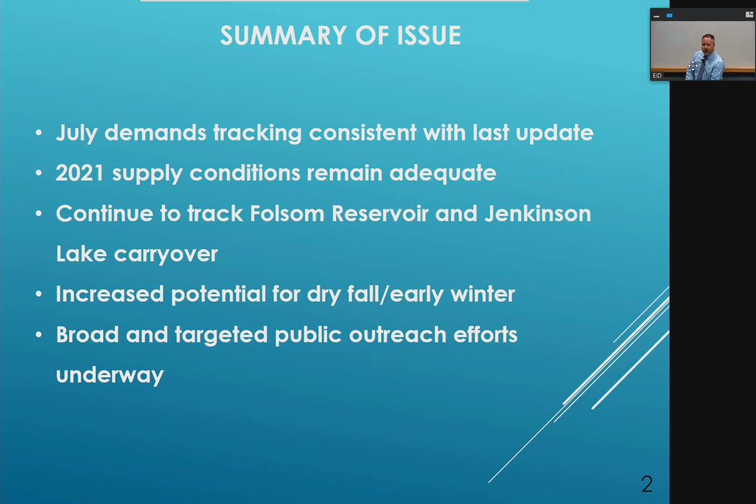Slide 3, please. These are just our standard water supply updates, this is as of last Monday. No significant changes, just the typical trends you see this time of year.

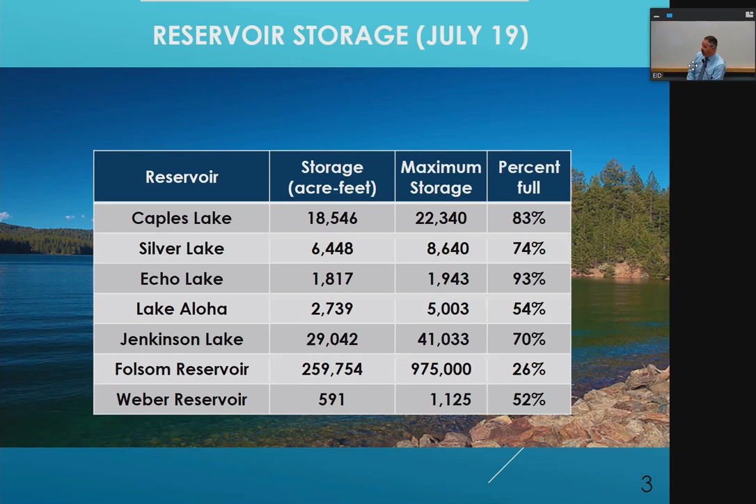We continue to meet all of our water supply demands, both at Reservoir 1, Reservoir A, as well as exercise permit 2112, previously diverted water, as the board's aware of the curtailment. We're working very carefully to exercise our water right portfolio in light of current conditions. And Folsom Reservoir continues to trend on that projection of meeting the 200,000 acre-foot carryover by the end of September, which is important for the district's intake structure later this fall.

Slide 4, please. We tried to make this slide a little more legible. I know it's always a big bowl of spaghetti noodles, but what we did is show the typical years—what we call that—we kind of made all those pastels.

So you typically were operating in that 25 to 41,000 range. Remember, this is a 2-year reservoir, the only district 2-year reservoir, and we're in year 2 of these dry conditions, so now we're down in these lower conditions. We've ticked up maybe 100 to 200 acre feet for end of year in the most conservative, very dry conditions. What you typically see if you look at the curves, October, November, December, is that flattening out.

We get a little bit of rain, but obviously we have to plan for the worst, plan for no rain, and that's why you see that slope continue. But if you look at almost every single year, that's not the case. We hope we'll see some flattening this fall, but nevertheless, we continue to plan.

So we haven't really been at this level in about 25 years, since 1994. Pretty significant, but nevertheless, the reservoir is doing what it was supposed to do. It's a 2-year reservoir, and we're meeting our supply and demand projections.

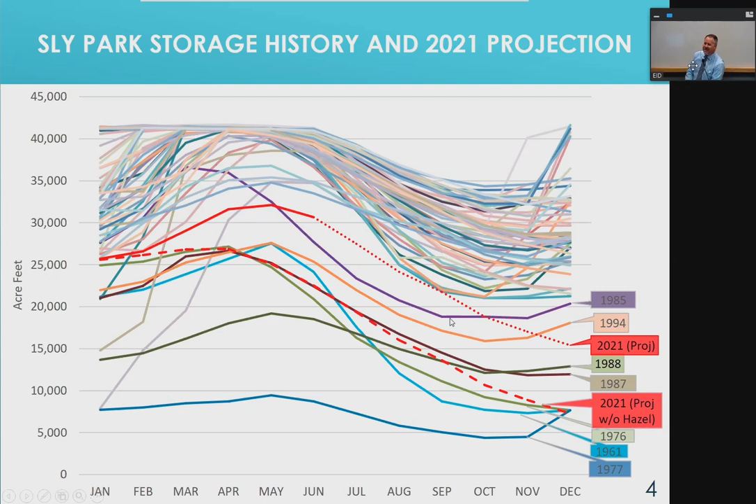So we've now moved to drought declaration, drought emergency in 50 of the 58 counties, and that's why the General Manager described some of these funding sources starting to come available, specifically hauling, which is the one we're looking at short term to see if we can qualify for.

Since your action at the end of last month, the governor has now also asked statewide for a 15% voluntary reduction—what we call voluntary conservation. So it really conforms to your action as of last month.

I think it's important to point out, or maybe just a coincidence, but we asked for a 15% voluntary reduction, and the governor immediately copied us. My gosh.

Leading the way. Right. Slide 6, please.

Okay, and it looks like we're on track to use district-wide about 5,500 acre-feet this year, which is about 4% over last year. So as compared to that spring trend, we're getting much closer to that typical demand—that's pretty much what we expected. This is even a little bit more favorable, I'd say. We were thinking 8 to 10 above, but what you see is in the spring everybody turns on their sprinklers, and by the middle of the summer everybody turns on the sprinklers, and now it's just a matter of asking for that voluntary conservation to try to get below that number, hopefully at some point.

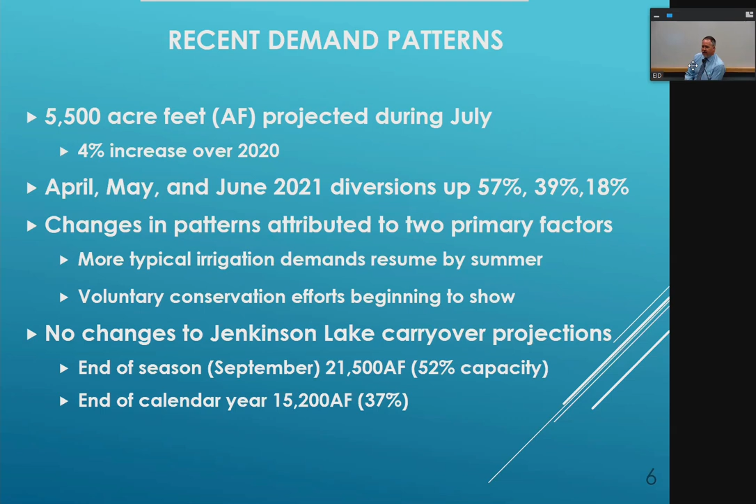We don't have any real significant changes. Like I said, 100 to 200 acre feet added to our end of season projection for Jenkinson, as well as that very conservative 15,000 at the end of the calendar year. Slide 7, please.

So I think this kind of does it in a nutshell. I hope there's not too many lines on this. Red is 2021, and our dashed line is where we project we will be, hopefully with some conservation—we'll continue to go below that. You see we're moving more toward the typical demand curve, and we've included that dashed line, which is our voluntary target, 15% below 2020. So that red dashed line is 15% below the yellow line, which was last year's demands.

You see we sort of crossed over that 2013 pattern, so obviously word is getting out that there's a drought, and people are recognizing current conditions and trying to do what they can. Pretty nice change of course over the past 30 days.

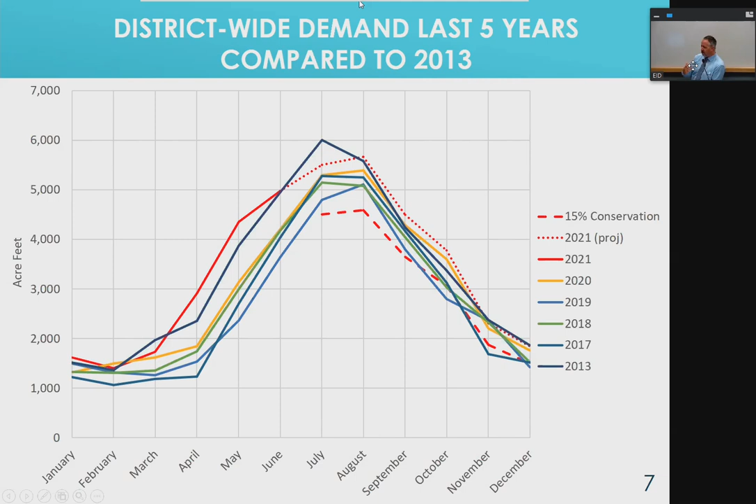Thank you, exactly, that was my point. Thank you, Jim. We're one of the fastest growing agencies, along with probably the city of Roseville. So General Manager's point is very important, that on a 1% annual basis, over 10 years you have 10% more customers we're serving, and obviously we're not. So it just shows it's important to look at that per capita consumption going forward. We'll probably provide some metrics along those lines.

Before you leave this slide, it's just interesting to note that our summertime demand is 6 times our winter demand.

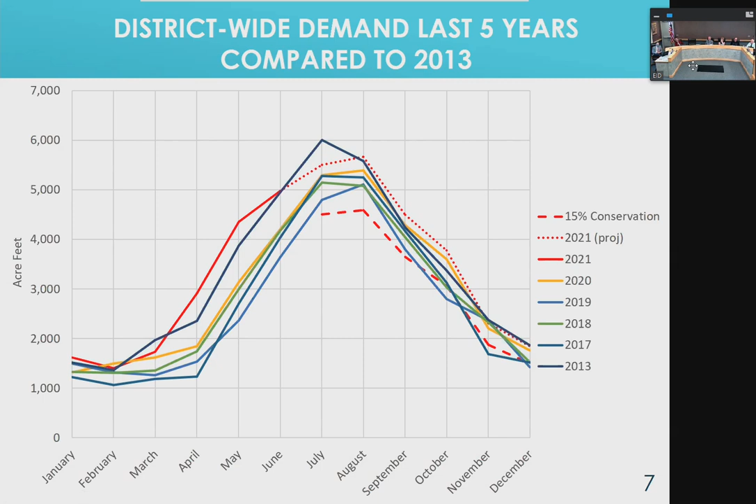Depending on how you slice it, we look at our water in storage. We're diverting water from storage, so we look at this on a monthly time step. This information feeds into some regulatory reporting that our engineering department provides.

The next slide shows similar data but for our recycled water customers. I won't speak too much to this because we'll have Tracy come up in a minute to dive into the details of how we're managing the recycled water system in these challenging times.

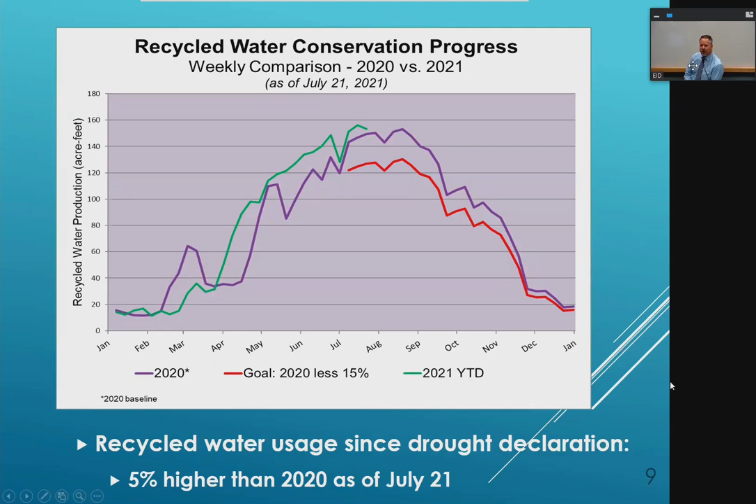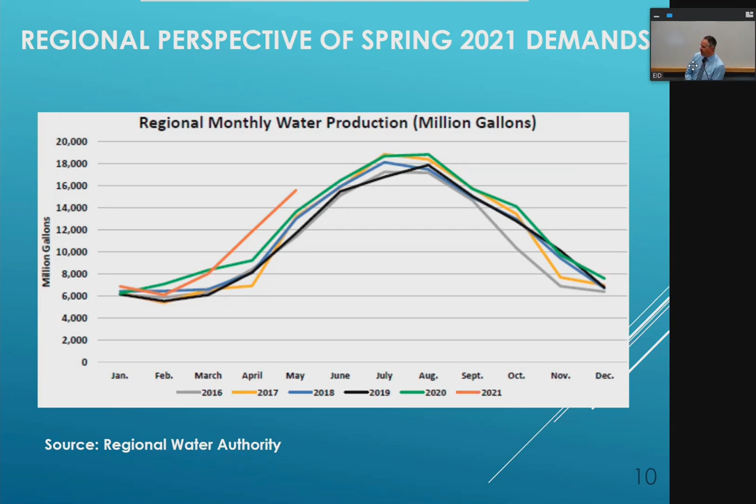Okay, next slide please. It's important to give a regional perspective of how our customers compare to all of our neighbors. This slide was shared by the Regional Water Authority, covering all the water purveyors in the greater Sacramento area, roughly a 3 to 6-county region. As you can see, everybody was significantly higher this spring—we weren't alone, we're all responding to the dry hydrology. Unfortunately they're still crunching the June numbers so it's a little lagging, but we'll continue to show this data going forward since it's important to know how our customers compare to the rest of the region.

Slide 11, please. We haven't gotten any updated projections of concern regarding Folsom. Obviously things will be tight later this fall, and it depends on whether it starts raining. But through our main demand period, our water supply intake is secure. Going into the holiday season, if needed, we could rely on Jenkinson Lake to meet demands if that facility wasn't operational. We don't project that to be the case, but we can meet our peak summer demand when that facility has to be online. We'll continue to follow and give regular updates.

Slide 12, please. Are we continuing to divert into Jenkinson Lake? No, we basically ran out of sufficient water to do so around the 10th to 13th of June—mid-June, something like that.

So we moved our targeted volume. It's important to note that supply functions in concert with our Reservoir 1 supply. We aim for a target, hit it, and then allocate the rest of the supplies so Reservoir 1 has enough water to operate for the rest of the season. We'll fully utilize that water right, but we have to make projections and plan carefully how we spend that budget. As a sales plug, this is also why it's important that we refurbish the intertie between Res 1 and Res A. Exactly.

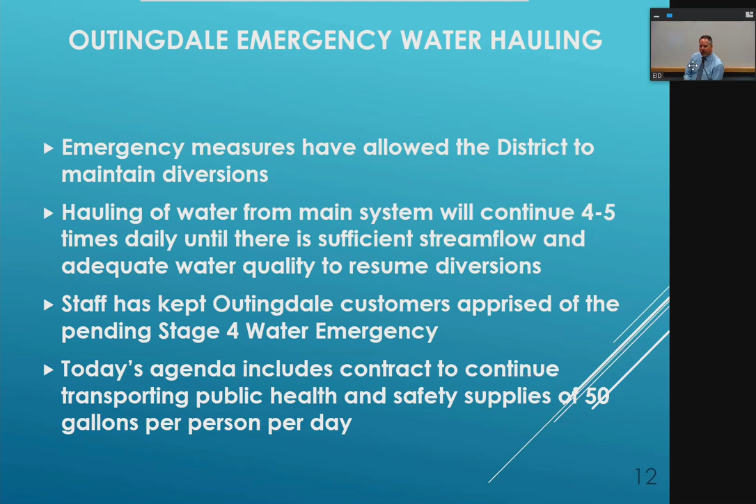Okay, slide 13, please. And now I'm going to turn this over to Tracy to discuss recycled water for you for a few minutes.

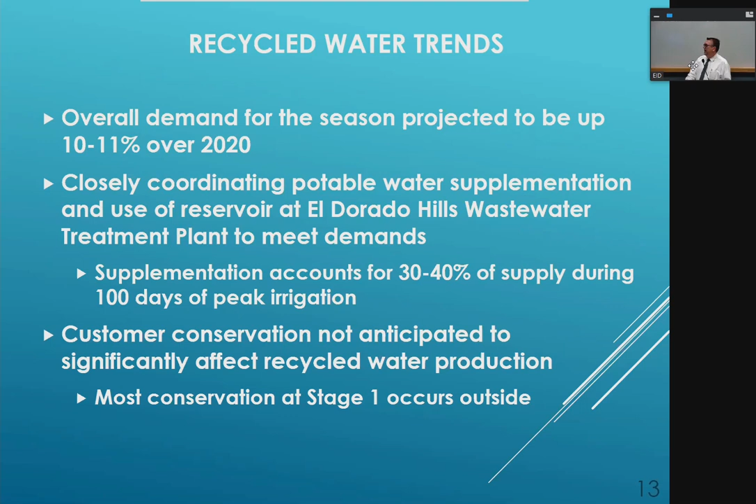The current conservation on the drought declaration, we don't expect it to have a dramatic impact on the baseline flows of the treatment plant because most of the conservation efforts will be towards outdoor use, and you won't see a lot of change from the baseline flows of the treatment plant.

Next slide, please. So this is the overall projections. As Dan mentioned a little bit ago, on a week-to-week basis since the drought declaration, it looks like we may have seen a slight improvement, but this is representative of the 10% overall increase in the recycled water demand so far this season. That's a combination of new accounts and it's just been really hot and dry. And it really shot up.

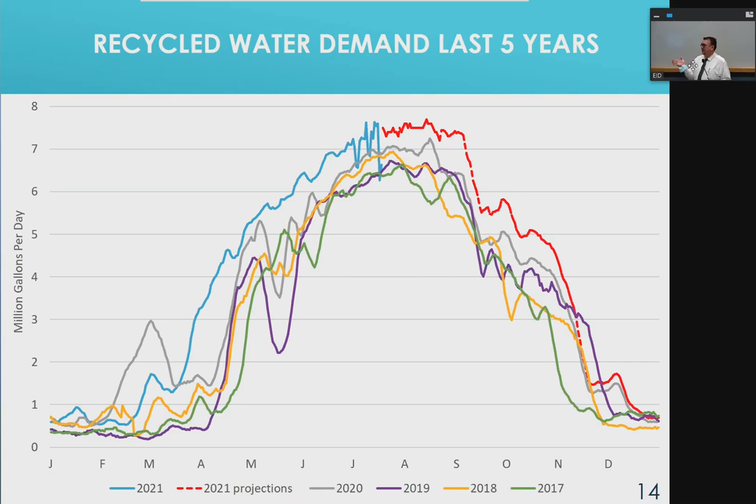We've seen a little bit of the modulation, similar to what you see in water. We saw a really steep increase, but as the summer's gone on, people have settled in, and it kind of sort of flattens out more to a normal pattern. Next slide, please.

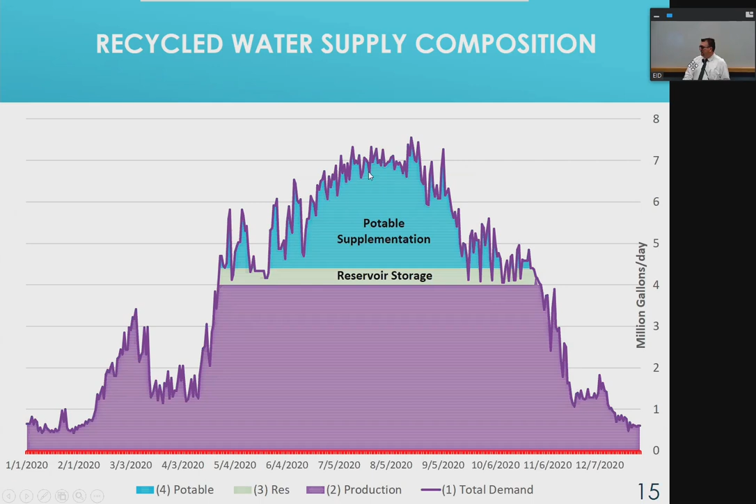Next slide, please. In actual operation, it looks more like this, where you see that we're able to use that storage reservoir at the El Dorado Hills facility to make up days when the potable system might become constrained. And then on days where there is more water available, we can conserve that for later on in the season.

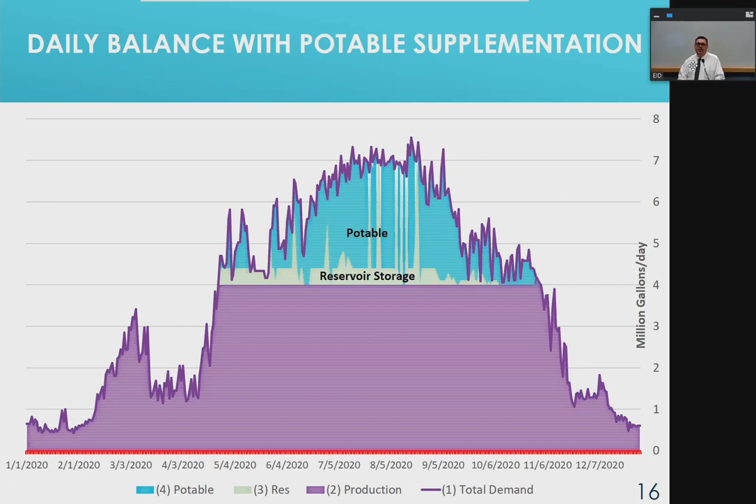Next slide, please. So as I said, that storage reservoir is very important. Even though it's a small percentage of the overall seasonal usage, it really represents operational flexibility, and it's the leading indicator of what we have available to us at any given time.

If you look at the top model run, if we're using roughly an average 7-day average of 400,000 gallons from that reservoir, we're able to make that reservoir last into October. The goal here for us is to start the season with that reservoir clear full and end the season with that reservoir empty. So the top model is sort of where we're standing right now - if we just average about 400,000, we're able to stretch that reservoir volume out into October.

And the bottom reservoir model is the hypothetical scenario if potable water went away. If we didn't have any potable water, you can see that red line drops down around August 1st.

We have about 8 or 10 days before we wouldn't be able to meet those peak demands anymore. Although I'm not here to sound the alarm. We have our bi-weekly meetings, and right now staff still feels like we're going to be able to meet the customer's demand for the 2021 season. The real concern would be if we have a longer term drought, then that would be a concern.

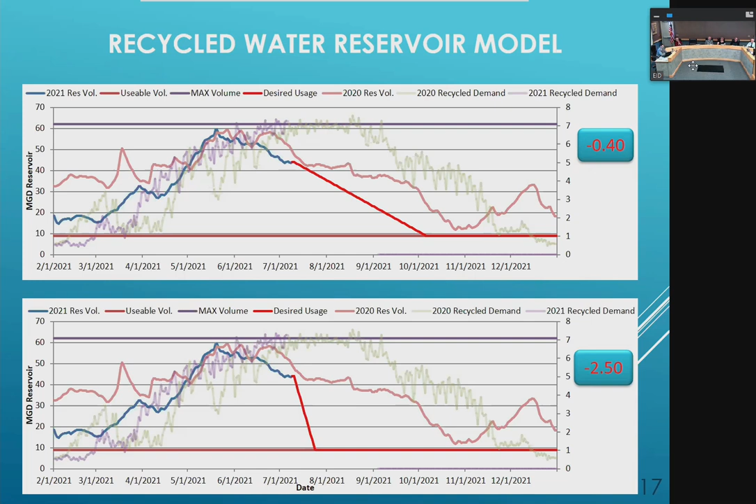For the record, I'm happy to look at all the infrastructure we're willing to put in. But one of the points we're trying to make this morning is that we're utilizing 100% of the recycled water available to us right now. In fact, so much so that we have to rely on potable water to help meet peak demand. More storage would certainly help.

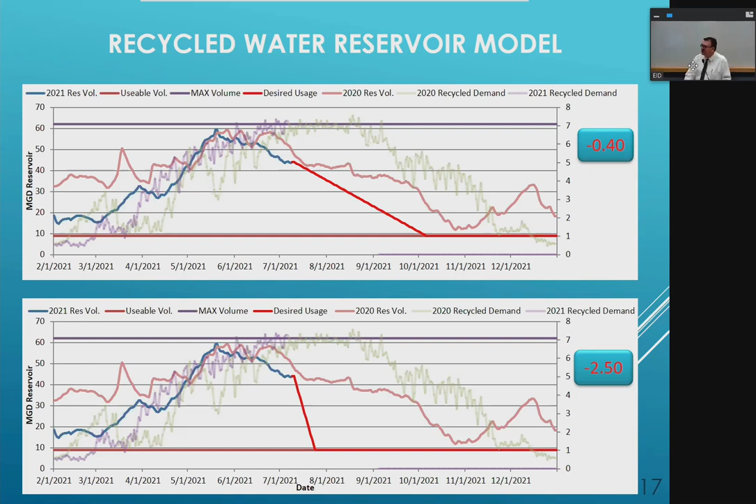And with that, I'll turn it back over to Mr. Corcoran. Thank you. We're almost done here.

As we discussed at the beginning, we look at the long-term climatic models, El Nino Southern Oscillation, and there's more potential for La Nina, colder, drier conditions, a slight increase in the likelihood. I like to give positive news, but this isn't very significant unfavorable news. It's not trending in the right direction at this point, still quite a ways out. We'd like to see at least a half degree, maybe three quarters of a degree, above normal long-term in the eastern equatorial Pacific, so there's the lingo.

I think what we're most concerned about, which you've seen especially this May from state forecasters, is the cumulative moisture deficit. That's new lingo for Webster's dictionary, meaning with multiple back-to-back dry years, the underlying ground is so dry it's going to take a while. You've got to keep watering before that water actually runs off instead of soaking in. So even if we get a few thunderstorms, it will be a while before we see surface flows again, and trends at Outingdale will give us a hint.

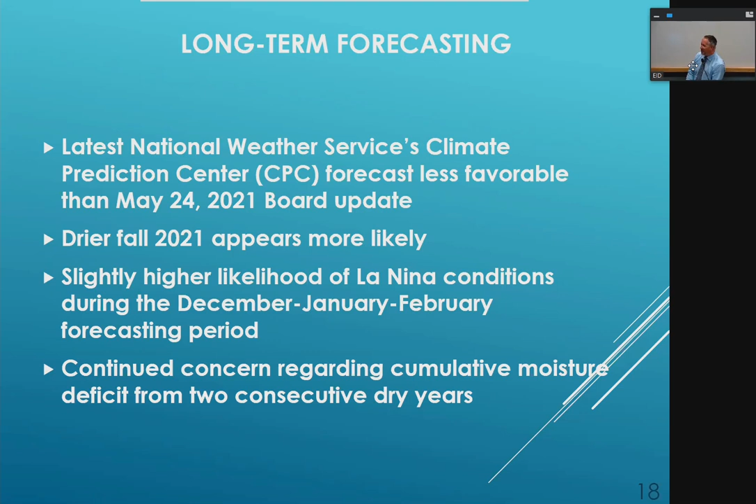We'll see, that's kind of our easiest small barometer, and then we'll move forward from there in Project 184, etcetera. We're fortunate in Project 184 because the upper area is mostly overlying bedrock, so it's a little different than the lower watersheds and why they were so significantly impacted. Okay, next slide please.

The timing will be earlier, but we're hoping we were able to make it through most of the summer. We see a lot of boats coming up the hill because they can't go to Folsom or other places, so we've been fortunate to provide a pretty great opportunity. Think about another unanticipated benefit: if we had not moved that water to Hazel about the second weekend of May, we would have had to impose this restriction—meaning no water skiing all summer on Jenkinson Lake. So it would have been a much different opportunity. The primary intent was water supply, but there was another recreational benefit that occurred.

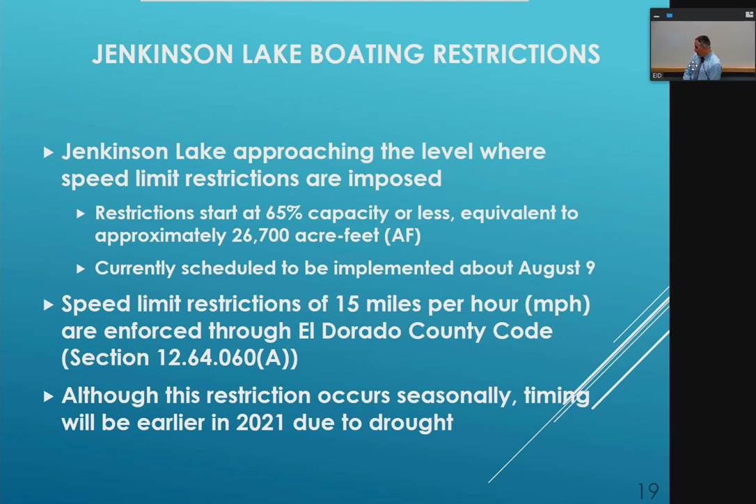I've got a couple slides on public outreach, using a variety of means and methods. Our primary focused outreach is to those 193 customers most affected by current hydrology—the folks in Outingdale moving through some really tough conditions right now. In addition, we did a news release following the declaration on June 28th, which went to all news outlets and all customers who subscribe to e-notification, social media, Facebook, Nextdoor. And amazingly, 89% of our customers have an email, so 89% received a direct message regarding that action at the end of June.

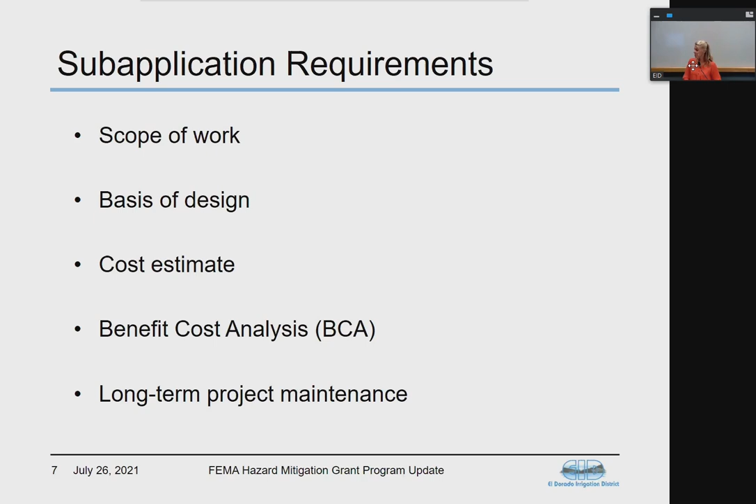Absolutely, yes, and I'd like to give special thanks to Rudenko and Tracy for assisting with that benefit cost analysis. A lot of work went into determining PSPS likelihood, wildfires, and the number of customers impacted, so a lot of information went into that program. Thank you to Rudenko and Tracy. Alright, next slide.

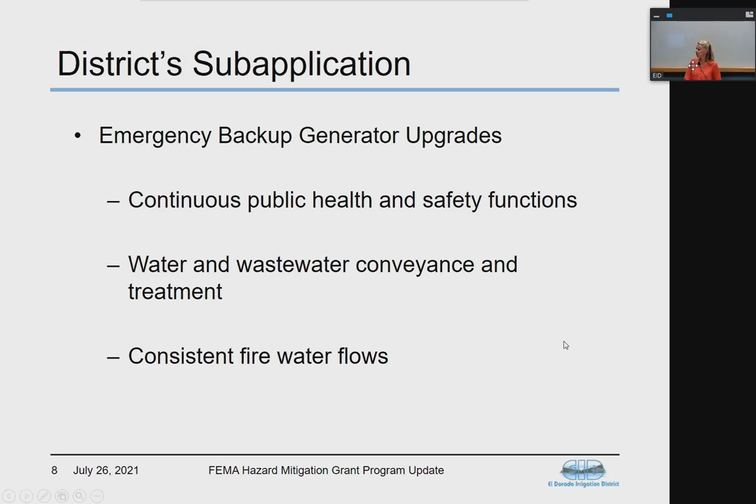When the sub-application became available, the district's engineering and environmental staff thought this would be a great opportunity to obtain some non-rate funding for backup generators. The overall intent of this project was for continuous public health and safety functions, in particular water and wastewater conveyance, and also to maintain consistent fire flows during these emergency outages.

Staff included 22 stations, ranging all the way from El Dorado Hills to Camino Heights. We tried to cast the net very broad and include any stations that did not currently have a generator and that could also spatially accommodate one.

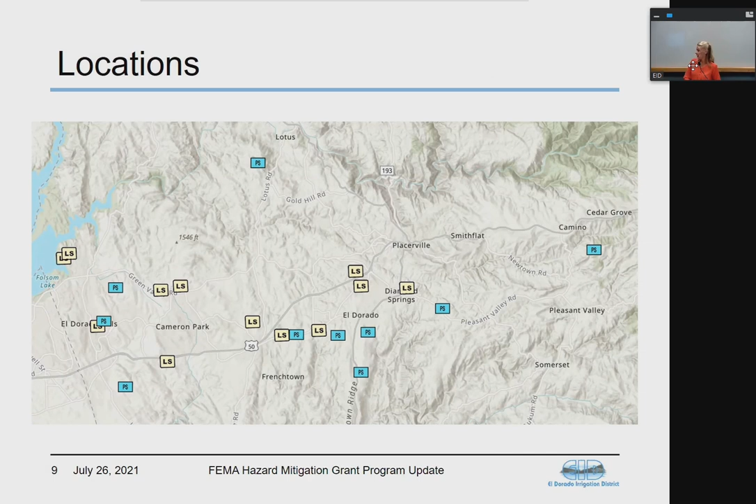There are still a handful of stations that were not included. Our ops team has been very innovative with trying to look at solar panels or battery packs just to maintain communication. So although we might not be able to fit a generator and run the station, at least we'll be able to see what the station's doing and assess when we need to go and respond. Next slide.

I've included photos of a couple of stations that are included in the application. Just for perspective, during an outage, it's operations all hands on deck, running around to all the different lift stations, transporting the generator, hooking them up, either pumping down the wet well or pumping water through the distribution system. So it's quite an effort of constant mobilization and demobilization of generators. This project will really help ops during these outage events.

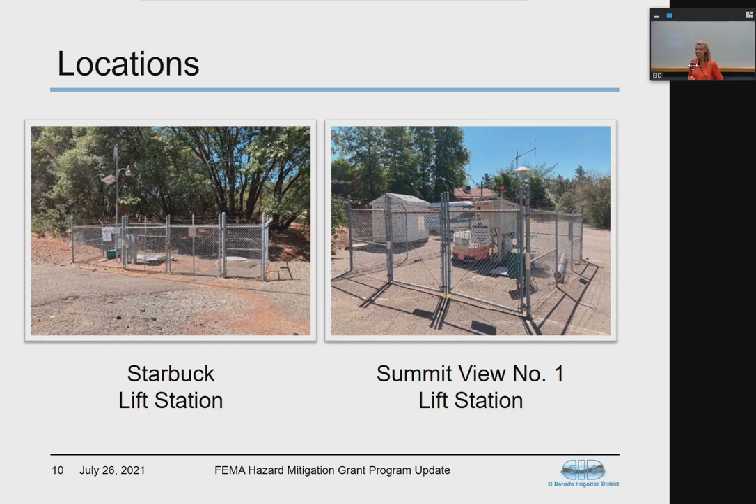Next slide. So the scope of work for this project is to perform some preparatory site work, so minor fence work as needed, some conduit work and some concrete flat work. Install the backup generator, install an automatic transfer switch, and then also integration with our SCADA system, just so we can see what the generator is doing, any alarms, statuses, and whatnot.

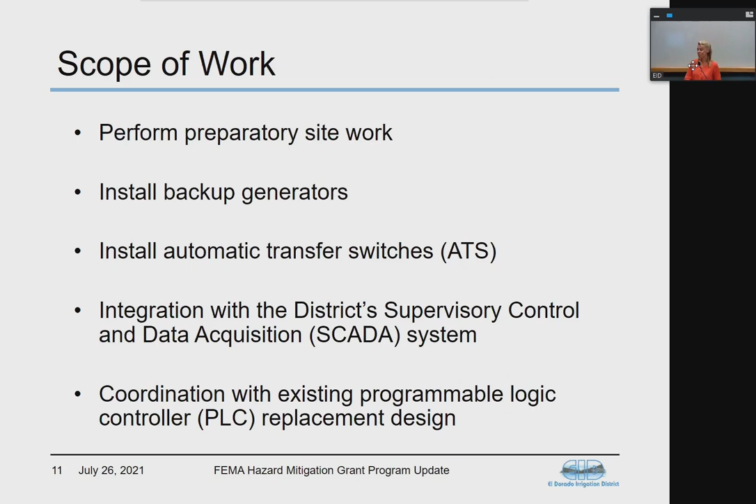Staff also decided to coordinate this project with an existing PLC replacement project already on the CIP, to replace 4 PLCs at the sewer lift stations. The thought behind that is we have a contractor there on site already, which will reduce mobilization and eliminate any redundant programming that would be required. Next slide.

The overall project schedule, I'd like to jump right into design and then solicit the bid package, hopefully at the beginning of 2022. Perform construction in 2022 and 2023, and cross our fingers, hope that generators are there and ready to run summer of 2023. The grant requires us to complete this project within 3 years, so all hands on deck. Next slide.

Staff is not requesting any funding at this time, but I did want to include this slide just so everyone has perspective going into it. Total project estimate as of 2019 was $2.4 million. The HMGP will provide a 75% reimbursement of those costs, so the district funds will cover the remaining 25%, as well as the PLC replacement portion of the project. All of these costs will be included in the next CIP round for the 2022-2026 CIP.

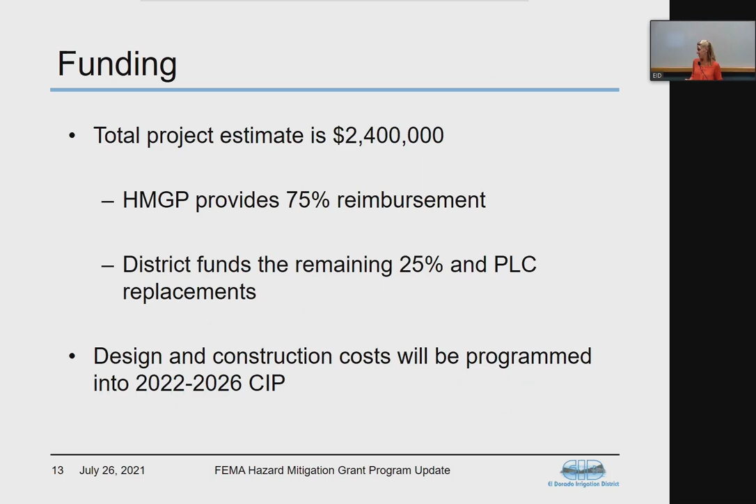All right, any discussion or questions? I have a question. One of the challenges in this whole public safety power shut-off arena has been keeping the generators fueled. In their design, what is the anticipated runtime for these generators?

Director Osborne, thank you, it's a great question. Our fleet manager and supervisor actually have every single generator asset's runtime, fuel type, and routes all laid out. So when we enter a public safety power shutoff, we have designated crews that know how often to go around. Those are for the sites that we can fill ourselves with dedicated fuel stations.

Other than that, the larger sites, like the intake at the Folsom Lake pump station when that went down, or Reservoir A, we do have Hunt and Sons from across the street there. We're a priority, obviously, as a public safety partner, to have those on a fueling route, so we make sure we don't get that sputtering sound of running out of fuel.

But can I ask, on this design, how big of fuel tanks are we anticipating for the new permanent installations? I don't think we're asking for anything outside the normal in terms of fuel tank size, because we can fit them into the routes of where we're going to go. Typically they have an embedded secondary storage, so if there's a leak in the primary storage - usually called the belly underneath the generator, the fixed unit - that's typically the design I anticipate.

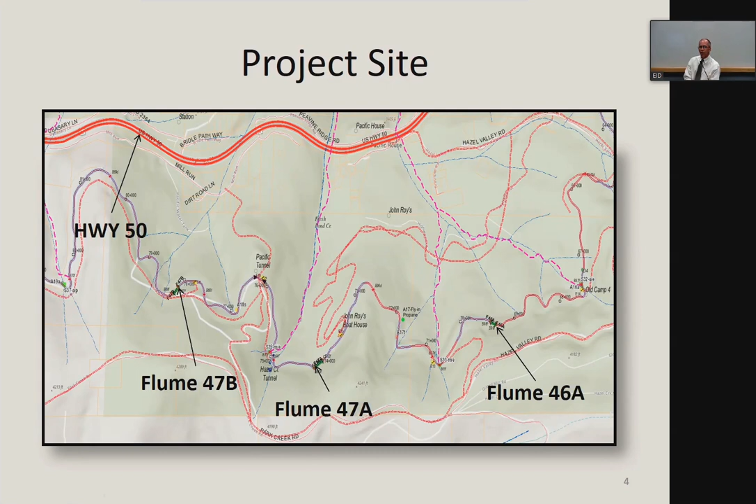Next slide. The next three flume sections are in relative close proximity to each other. They're separated by about 2 miles between 46A and 47B. Again, we have Highway 50 right below. What makes these a little bit more critical is that we have cabins and residential below each of these flume sections. So 47B, 47A, and 46A.

Note also, I'll point out 47A, we have an access road that goes already to the flume section. We will be needing to work on access for flumes 46A and 47B. If you can see it, 47B, this is our access road, what we call the flume access road for this segment, and it'll show up in a photo in a second, how we're maybe being able to get access with that. But again, that's that arrow, just that red line right below 47B there.

You mentioned residential down below those flumes. Is that one of the tracts? No, not one of the tracts. But there are residents in that area, especially right below 46A and 47A. There's a group of homes that we know that people are there full-time.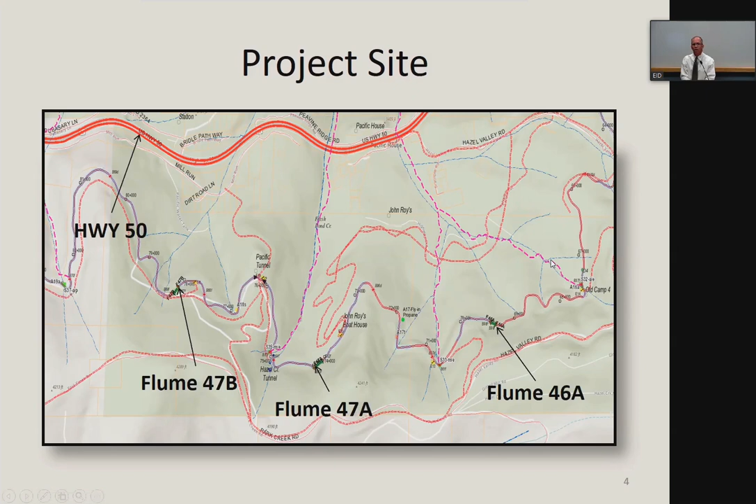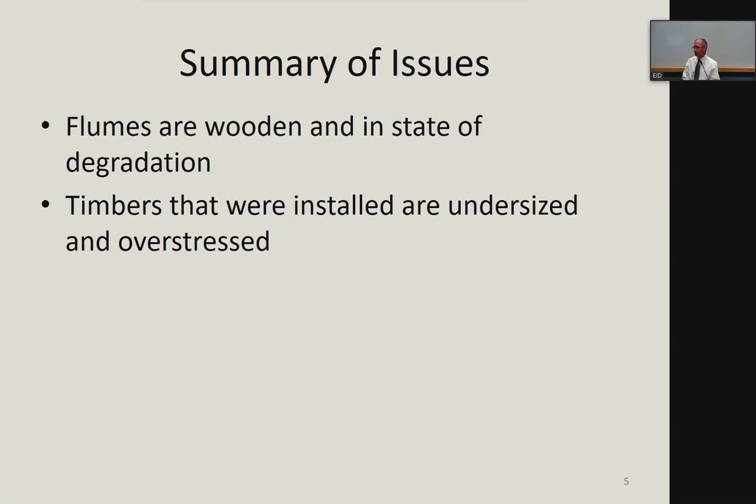Next slide, please. So what we're facing with these flumes is that these are all wooden flumes. They are in various different states of degradation. And most of the timbers that were installed at a time where now structural standards have increased. And so they are undersized and overstressed. We'll show some of the stuff that we're experiencing.

So some statistics on our flume. We have what we call a 45A, which has some fiberglass in it, and we're getting some delamination on that fiberglass. They all range in size between 120, 130 feet to 200 feet in length. These are flume segments that we're hoping, if everything works out right, our crews will be able to do.

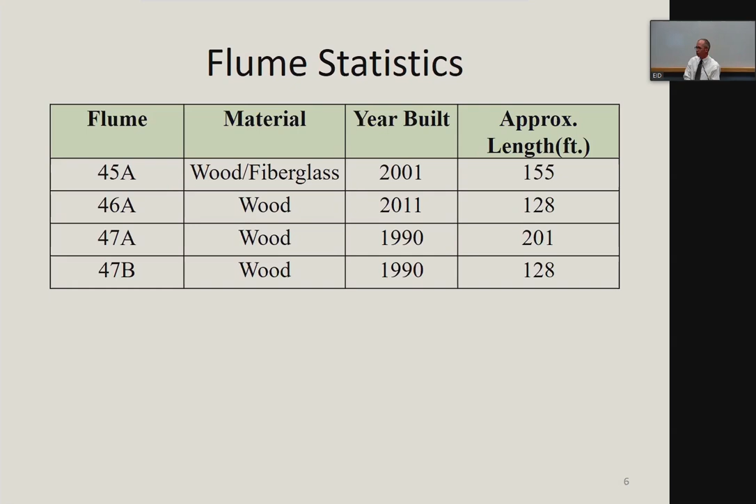You remember a couple of years ago we did Flume 47C. Our crews kind of got their feet wet with that. These are all of similar length and going to be a similar design. So we feel pretty confident, if time and budget allow, that our guys will be able to handle these during the outages.

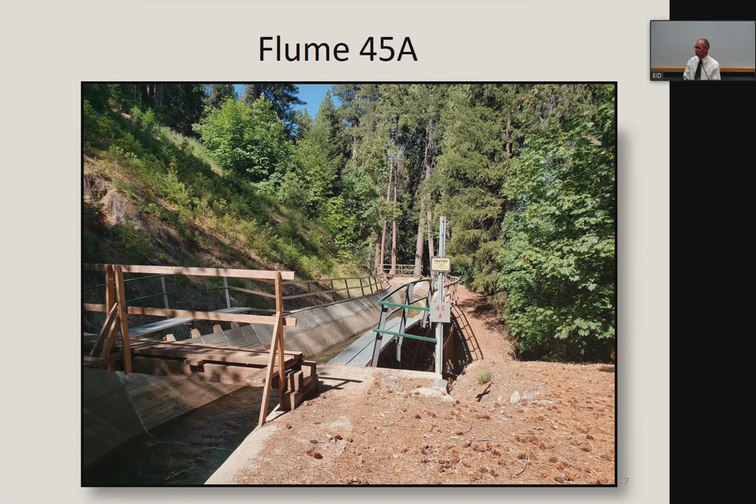So this is Flume 45A, our fiberglass section. If you notice the footbridge there, you'll see this segment right here. For people watching via Zoom, it's just the left-hand side of the flume, that different colored segment. That is the fiberglass section. I think it was done as an experiment to see if it would last a little longer than our wood. We didn't get the length that we had hoped with that.

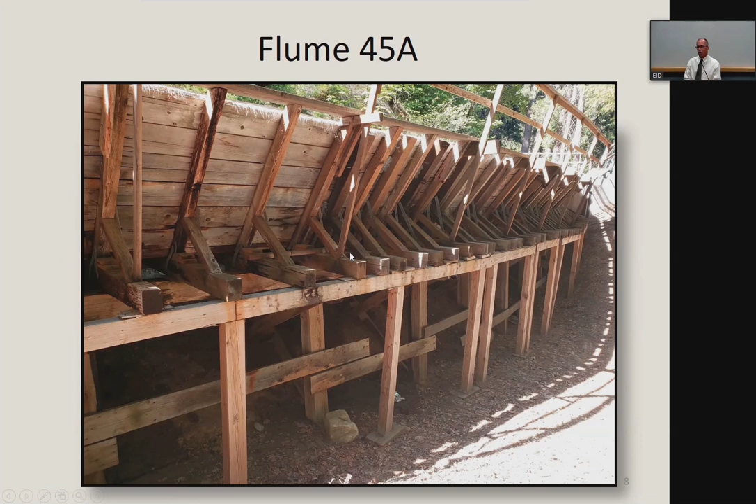This is showing the supports, how they've been re-buttressed over the years. This stuff in the foreground is what our guys have come in to add additional support. And you notice right below this segment, you can see where we've added additional cross sills in there, again to add some strength to get this through.

So, going through the next few slides, they're all in similar condition. This is Flume 46A. This is the one we've got to work out how we're going to get to exactly. There's a possibility of some access roads above it that we're trying to investigate now, but we're going to have to determine that during design.

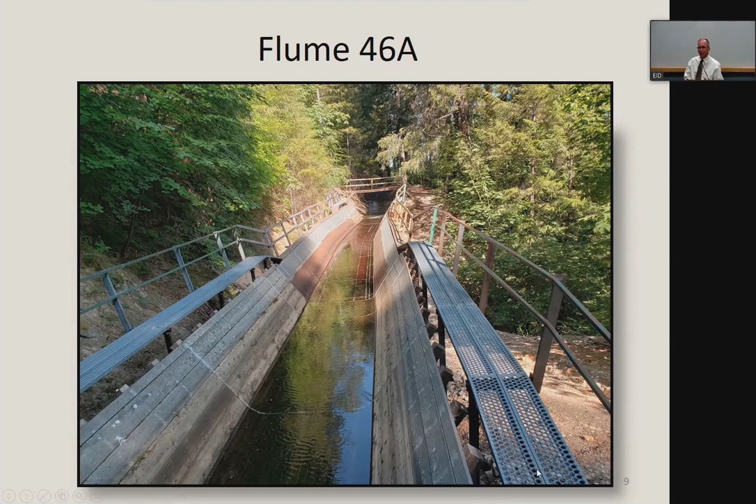You'll see that we have two different segments here. One that's been lined, that's this darker wood in the foreground of the picture and in the background right there. And this part is still the original timbers from the last redo of this flume in wood back in 2011.

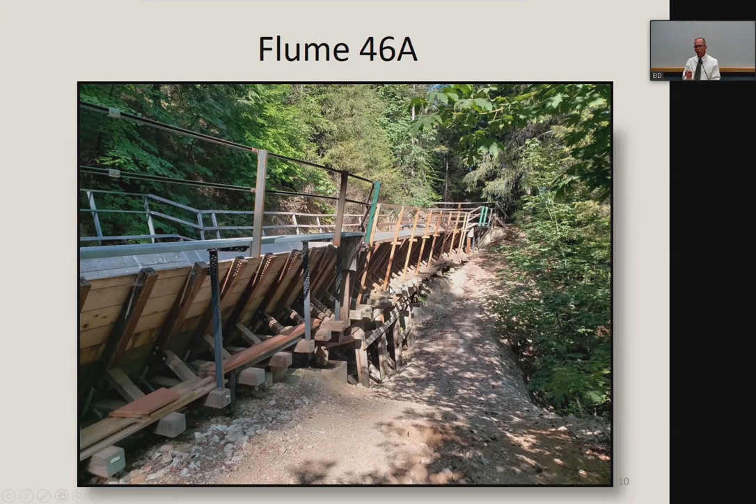So this is again the under-support structure. This shows again where we've got some additional buttressing in the low part of the slide, right in this area, and a little bit more along this segment right there.

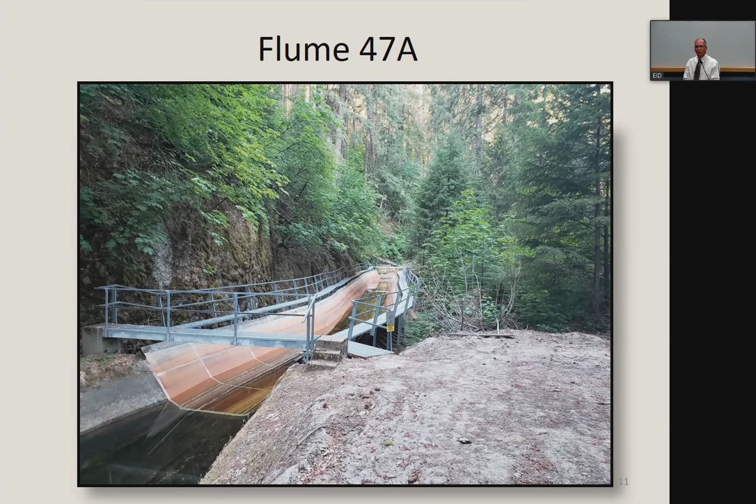This is Flume 47A. This is just upstream from that Hazel Creek tunnel where we take water into Sly Park. Upstream of things.

This one, you'll notice that all the timbers are located on the ground, which adds to some of the degradation with the water. When we water up, it takes a day or two for the wood to seal, and so we get some degradation on the wood because of that.

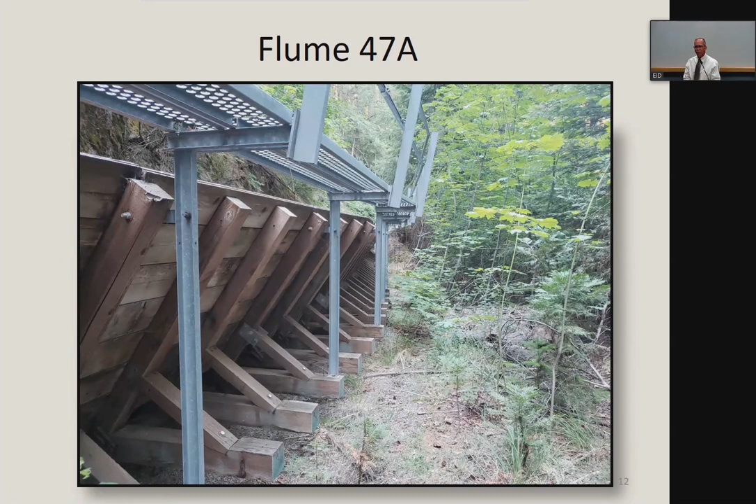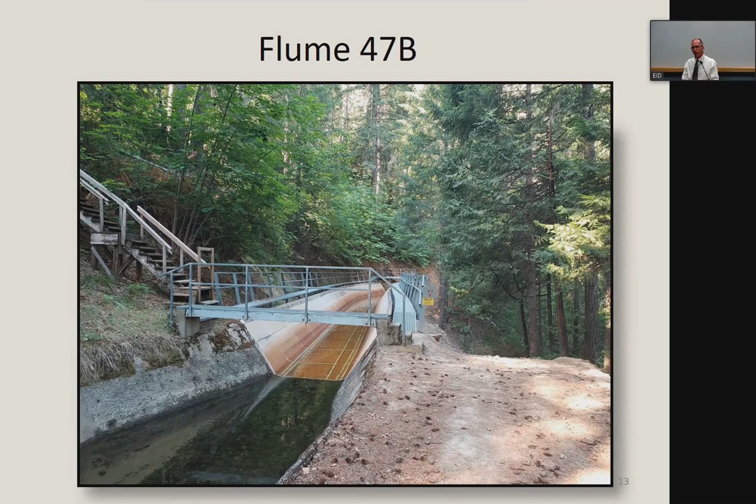This is 47B. Those stairs right there go to what we call the access road. It's rather steep, but we'll see if we can, during design, find a way to get down to this segment and be able to get equipment in to rebuild.

The next slide shows the underside again, similar to what we saw with the other flumes. The timbers again are resting on the dirt and need some work.

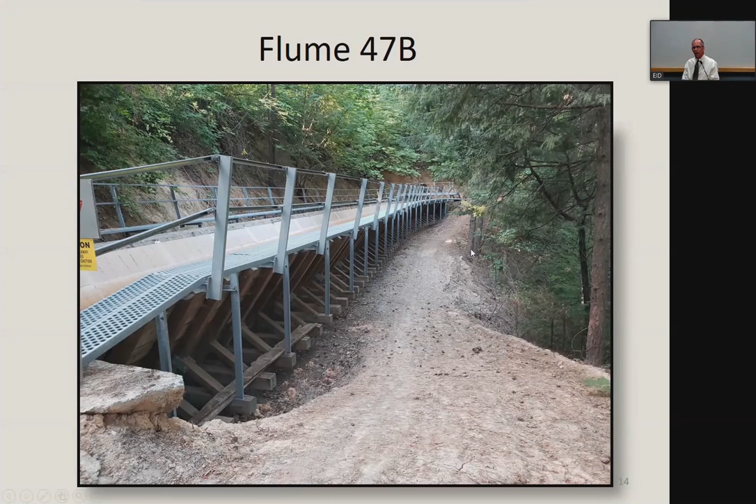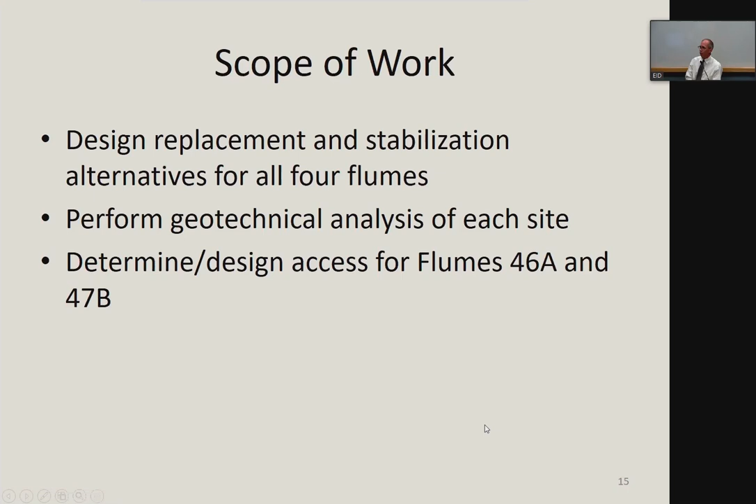So the scope of the work we're going to be doing is replacement and stabilization for all four flumes. A geotechnical analysis will be done to help determine our soil types underneath, to see how far down we're going to have to go if we do the MSE walls or just concrete abutments with flume sections, to get those worked out. And as I mentioned, the accesses for 46A and 47B will also be done.

So we had three proposals on our RFP: GHD, Gannett Fleming, and MGE. All these firms have done flume designs for us in the past. GHD was our low bid, and we looked at the number of hours, not just the cost, that they associated with each task. They're all in relatively the same scope with that, so we feel confident that GHD is able to get this work done for that price.

So the environmental review, this is going to be subject to CEQA. We did go out early in the spring to get the biological surveys done for any rare plants. We try to get those done in the spring, obviously, when everything is blooming.

So we have that part done, and we're waiting for the reports. We do need to still go out and get the cultural assessments done, and we have some funds requested in the package to get those evaluations done, to see if we have any stuff from the old construction in the area. Depending on how those reports come back, we may need additional funding, but we'll see how those pan out before moving forward.

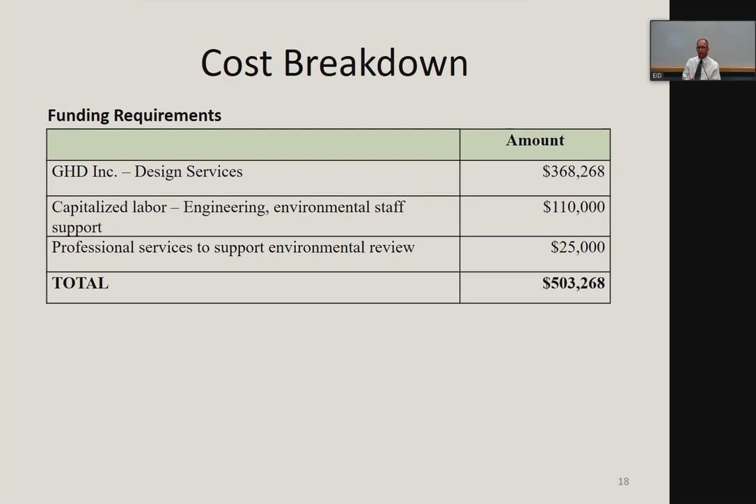So the breakdown we have is the cost for GHD's services at $368,000. Capitalized labor for both engineering and environmental staff was $110,000. The $25,000 is for those cultural studies, bringing a total to $503,268 for the design.

So board options. Option 1 is to award a contract to GHD Inc. in the not-to-exceed amount of $368,268 for design of flumes 45A, 46A, 47A, and 47B, and authorize additional funding of $110,000 for capitalized labor and $25,000 for environmental studies, for a total funding request of $503,268 for what we're calling the lettered flume projects.

Recommendations are option 1. Director Osborne? Just a question on environmental and cultural studies. This is basically repair of existing facilities. Shouldn't we just get a negative dec for this without having to go through all that?

I would think typically, yes, we would, but we've had stuff where we need to look for those cultural aspects from when the flumes were built, and those studies haven't been done from what I've been told. That's why we're getting into it. But typically, if we don't find any of those, and we don't find any plants, then it's a repair and we get a negative dec on that.

Okay, thank you. But so we're doing it this time because it's never been done before? That's my understanding, in essence, yes. Okay, when originally were these built? They've been all done with PG&E.

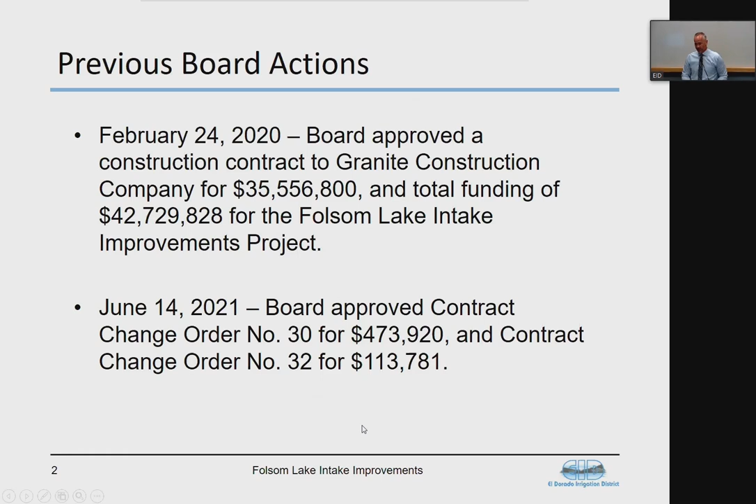Again, the board in February of 2020 approved a construction contract with Granite Construction Company for $35.5 million, and total funding for the project of 42.7 million. Most recently, during your last board meeting, the board approved change order number 30 for $473,000 - that was for the extra excavation required on the project. And change order number 32 for $113,000, that was for the overhead crane modifications that were required.

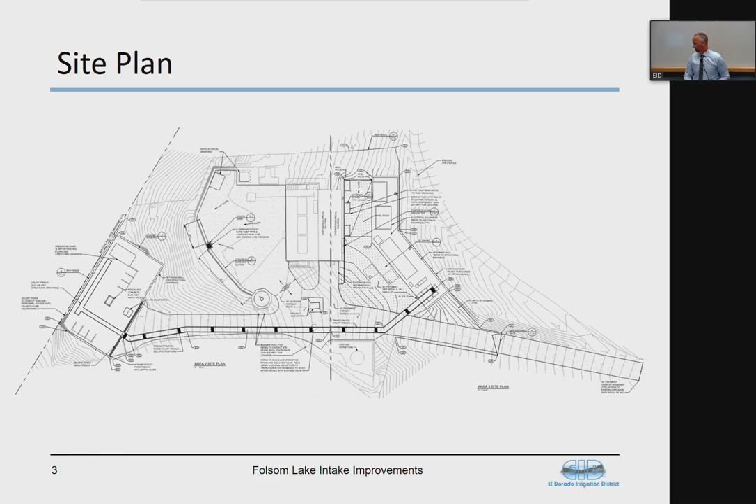In total, there are 112 segments of that discharge piping, 20-foot segments, and that's in general what this change order consists of - it's modifications to all 112 segments. After we received a submittal and engineering by the mechanical vendor, they discovered there's one lifting lug issue.

So again, you need 2 points of connection, one to pull those pipes and a second one to secure it while you are removing it. It was missing one of those lugs, and then due to the additional weight, we needed additional welding and a little bit more material on each of those.

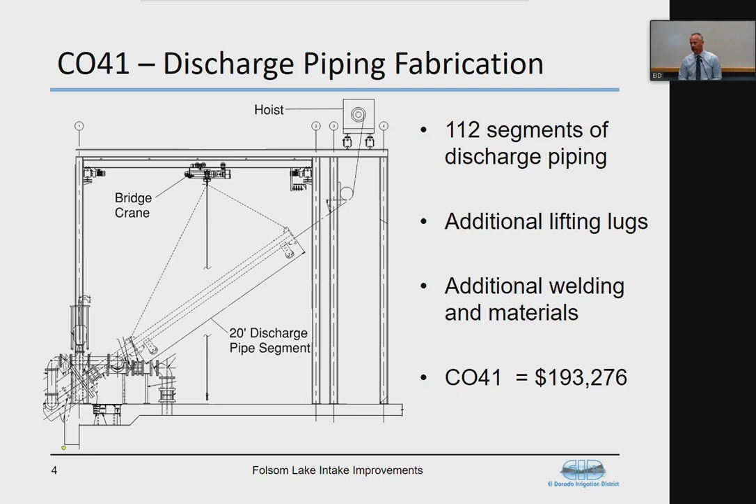So when you add that all up, it comes to about $1,700 worth of additional material, labor, and welding on each of those, for a total of $193,000. So that kind of sums up the change order.

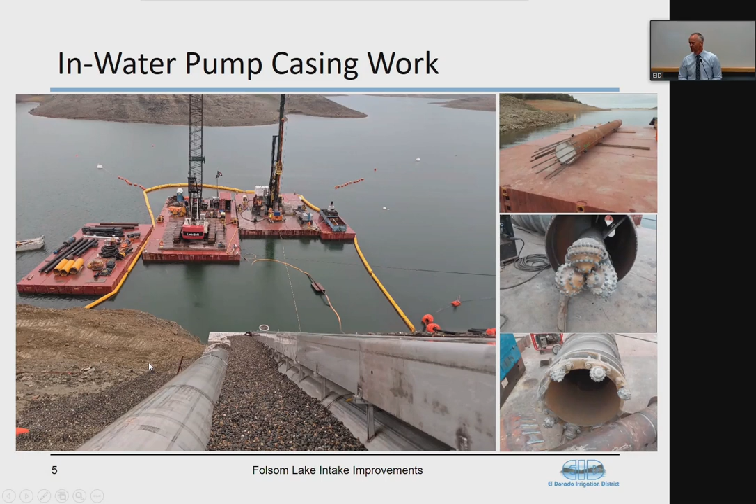That is by contractual price per linear foot, an agreed upon price. So really it's just getting back to the contractor, comparing their notes and finding out exactly what that linear footage is. Currently that's estimated at about $200,000. In the next month or two, they have 2 piles remaining. We'll be back for that change order.

So funding to date, currently we're sitting at just about 3.5% of our total contract price in project change orders. With the approval of this change order, it brings us up to about 4%. Again, we're sitting pretty well at this point in the project.

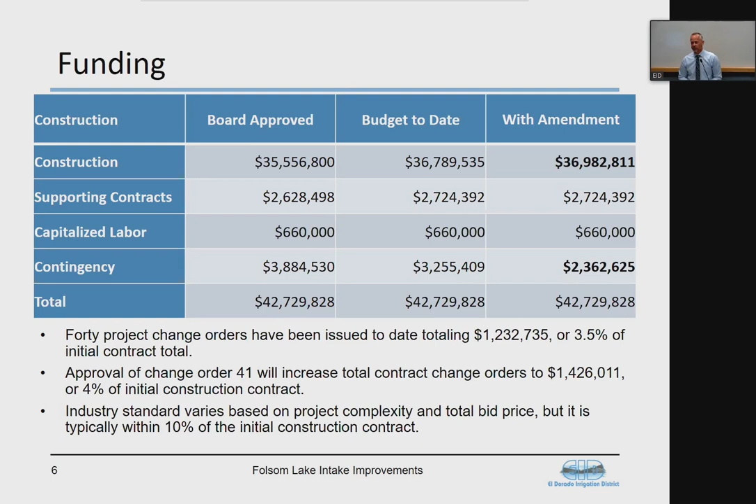We're probably at about 70 to 75% done. And we anticipate that, well, all of the submittals have been in at this point, so we're not looking forward to a lot of design changes or anything else as the project proceeds. So looking pretty fortunate at this time.

However, the final completion schedule has slipped. This is due to the ongoing drilling in the lake for the piers. The last two piles currently are not done, the lake never came up high enough for us to drill the highest two piers. So we now have to wait for the lake to go down in order to drill those with the crane that's mobilized on site.

So some significant changes in the schedule as far as shifting work forward and shifting work back. But that has added about another month to the expected completion date. So now we are out into February.

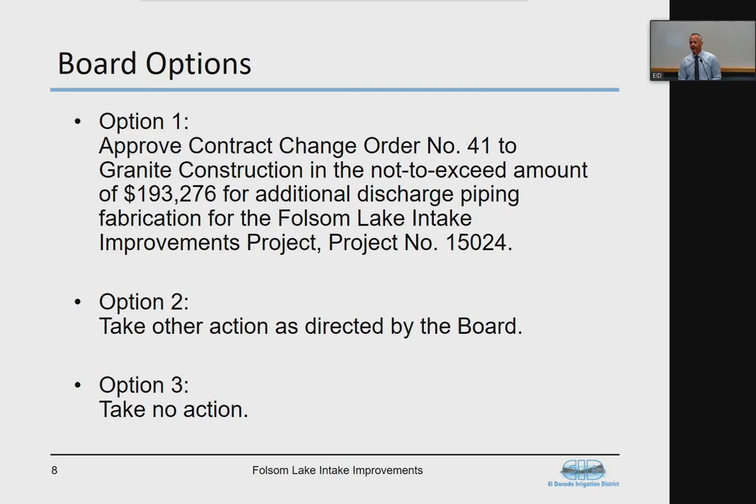But in general, as the options presented to the board today, we're asking to approve change order 41 to Granite Construction in the not-to-exceed amount of $193,276 for additional discharge piping fabrication. Option 2 is to take other action as directed by the board, and option 3 is to take no action. Staff's recommendation: I'll move option 1.

Thank you, Director Day. I'll second it. Thank you, Director Anzini. Any board questions or comments? A couple of, well, a question or a comment, or two questions.

These modifications to all the pipe segments, I mean, I know when you're engineering something, it's hard to foresee everything. Was this something that we could have foreseen, or? Yeah, I think it's a bit of an engineering oversight.

For sure, the second point of connection was, again, the design engineer's intent was to leave it a little bit flexible so that the pump manufacturer, the mechanical contractor, and the crane, all these groups can coordinate and kind of get the best price on that. And unfortunately, if you leave it a little bit open like that, it's open to revisions as well. And that's what we saw with both the crane and the discharge piping. So if we had a very firm design, it's a trade-off.

Do you open it up to more vendors and a little bit more flexibility and maybe get some pricing with that, or do you really nail it down and maybe get some elevated pricing because you only have one option? Well, at least it's better to catch it now than on our first repair, better now than when everything's on site and we have to modify everything there.